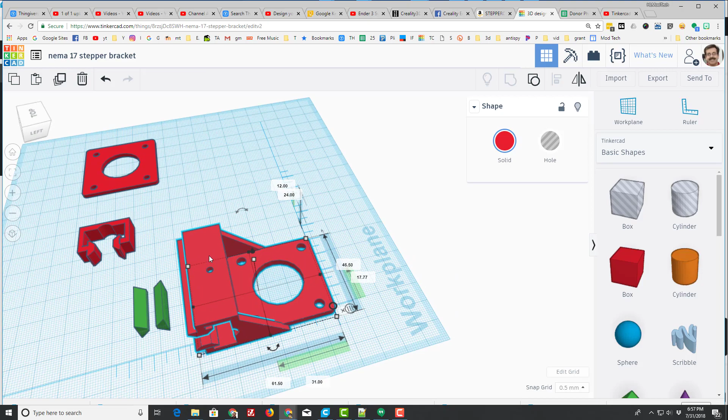Did a lot of trials, and here is my version. It slides on the printer up in the top, and then if you want, you can put a screw through and tighten it in. I think I made this 3mm, and the threads will be enough that it'll grip it. I'm confident that this is large enough and has enough friction that it's not going to move anywhere anyhow.

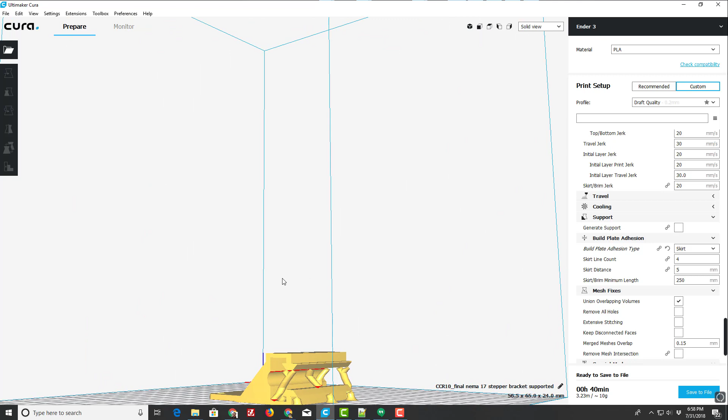I wanted to print mine laying in this direction, so I went into Meshmixer and generated those supports. Do make sure you remember to snip off these on the inside, they were a little sneaky, and then mine fit like you'll see in the video that follows. I'm about ready to test my printer with the new Extruder location.

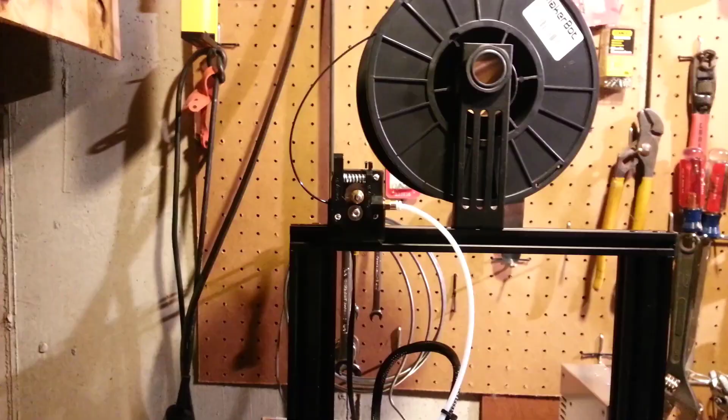Alright friends, by now you've seen this slick design, and I just wanted to share with you that I 3D printed a little design so this can slide on, and you can see there it fits inside the grooves.

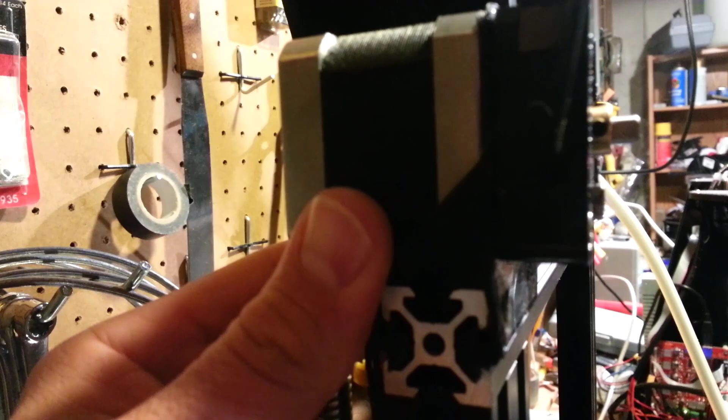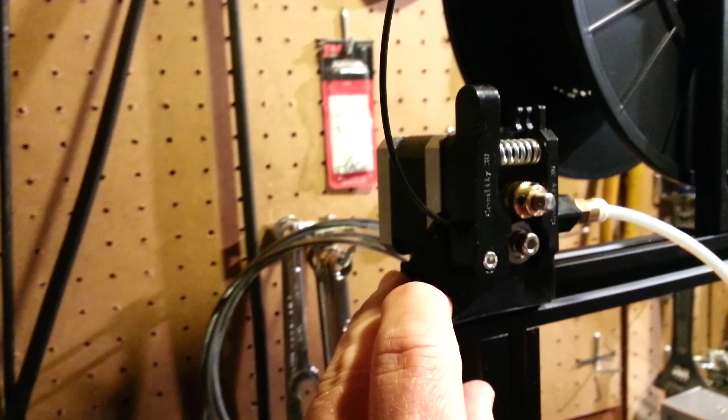Get it to the position you want, and then if you want to lock it in, you can simply have a hole in here, and I'll have a hole added to the Thingiverse part, so you could just tighten it down to your rod. I think I'm going to let mine be freely movable so I can adjust it as I get it hammered out to where the best location is.

Totally designed in Tinkercad, all using guess and check instead of actually measuring it out. But it turned out pretty sweet, and I'm pretty darn happy and ready for my first test print.